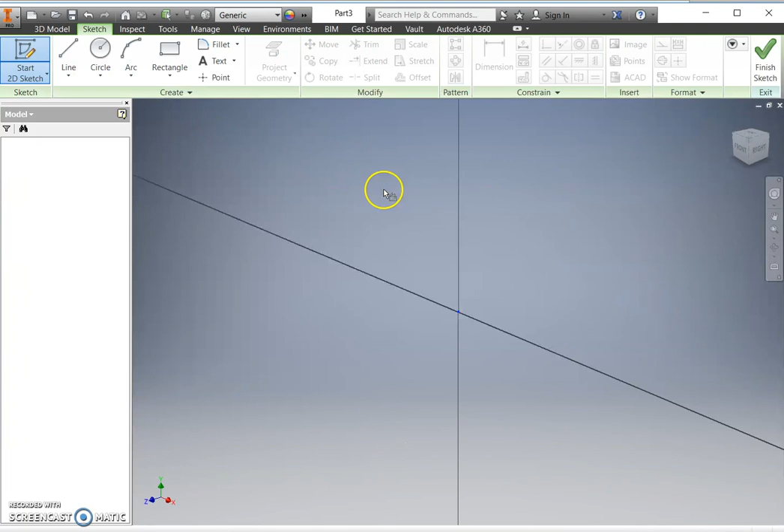Today I'm going to show you how to sketch simply using circles and then using a command called trim. So if we go to our sketch, we're going to select our plane and I'm going to draw two circles, making sure they start and finish at the same centre.

Now the sizes we were given, if we go back to our drawing here, radius of 60 tells us we're doing a diameter of 120, and a radius of 75 tells us we're doing a diameter of 150. So remember those two key sizes, 150 and 120.

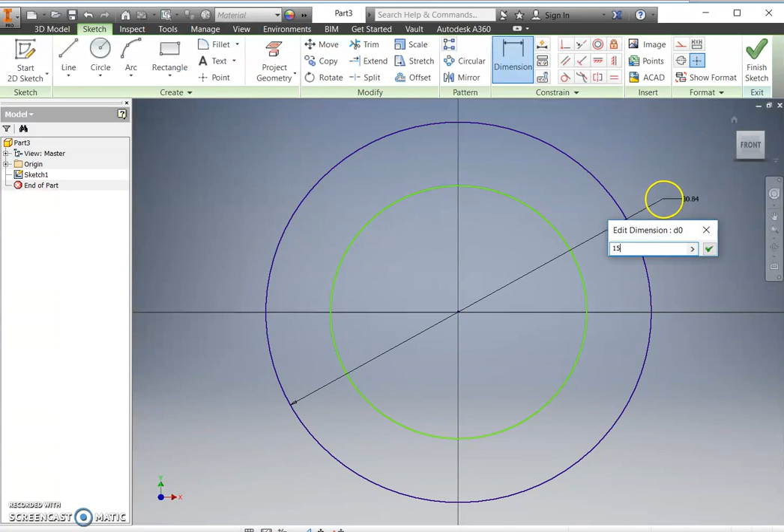So I'm going to use my dimension tool. My outside size is 150. I'm going to zoom all so I can see it. And then my inside size here is going to be 120.

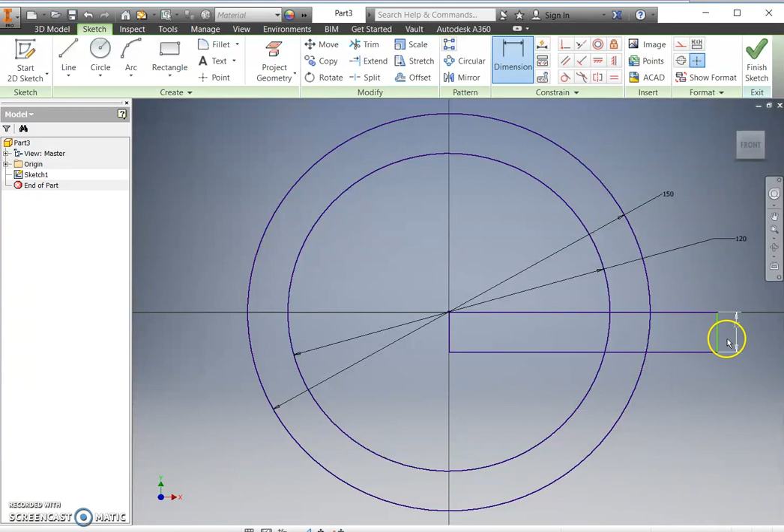I'm now going to draw two rectangles, again starting in the centre. The width here I'm looking for is going to be 15. And then I'm going to do a second rectangle down the way.

Now there are a number of different ways in which you can sketch this shape. This is one method. Feel free to use any other method.

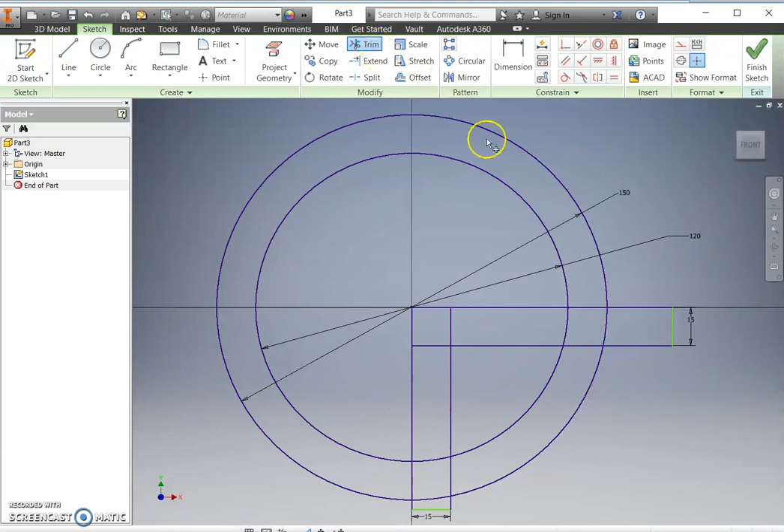So now I'm going to trim to remove the parts that I do not need. That leaves me with my curve here and here, and I'm not going to need anything outwith or within our shape.

You'll see here that it's not letting me trim this because it has a dimension on it. So if we want to do this, it's fairly straightforward: we're going to right click, delete, and then I should be able to trim away the excess material.

Likewise down here, it's saying it doesn't want to do this. Let me just move this up a section. So if I remove the dimension, right click, delete, then I can trim away the unwanted material.

And that leaves me with my basic profile. How thick this component is, I can see it is 10 millimeters.

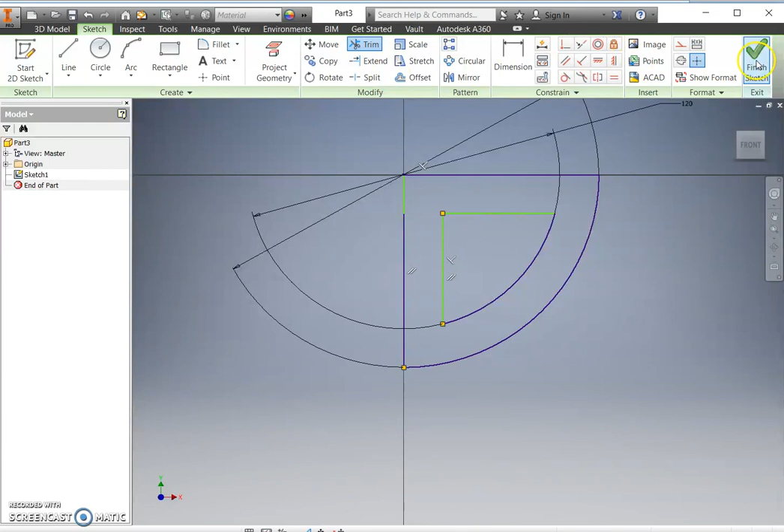So finished in the sketch, let's zoom all so we can see our profile. We're going to extrude. There's the profile, and we're going to extrude it through 10 millimeters. So that's the basic shape done.

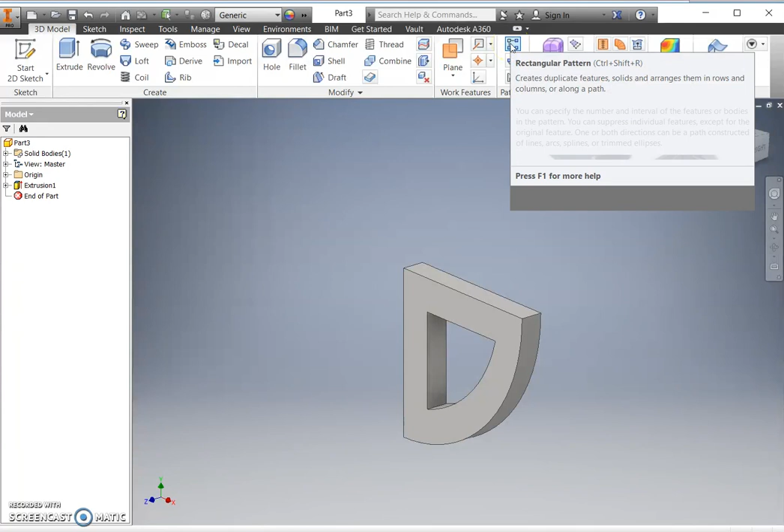That's the basic shape for both Model 4 and also Model 5. I'm now going to take you through our rectangular pattern tool, which you will need to create Model 4, and also our circular pattern tool, which you'll need to create Model 5.

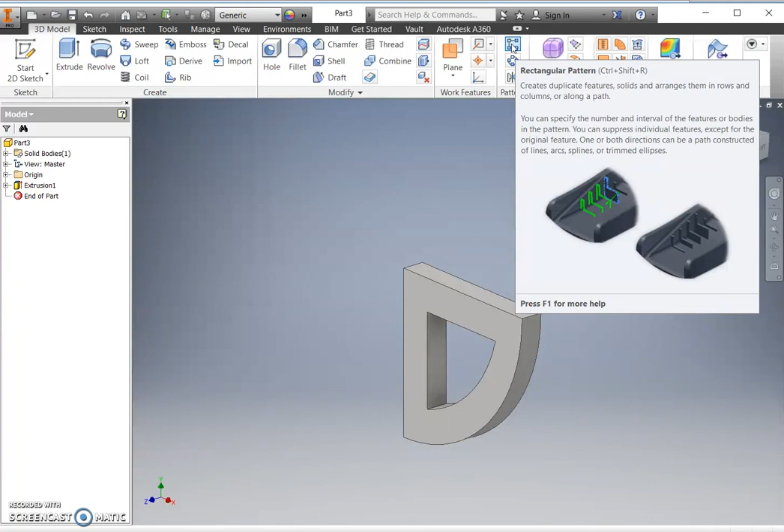So let's go with our rectangular pattern. If we just spend a little minute to have a wee look at the description here, it tells us it's there to create a duplicate feature and it arranges them in rows or columns along a path. So it allows us to repeat things over and again without having to model them a second time. So the first thing I need to know is what feature I'm going to repeat.

I can either select it from here or from my model tree. We then need to decide which direction we want to model in.

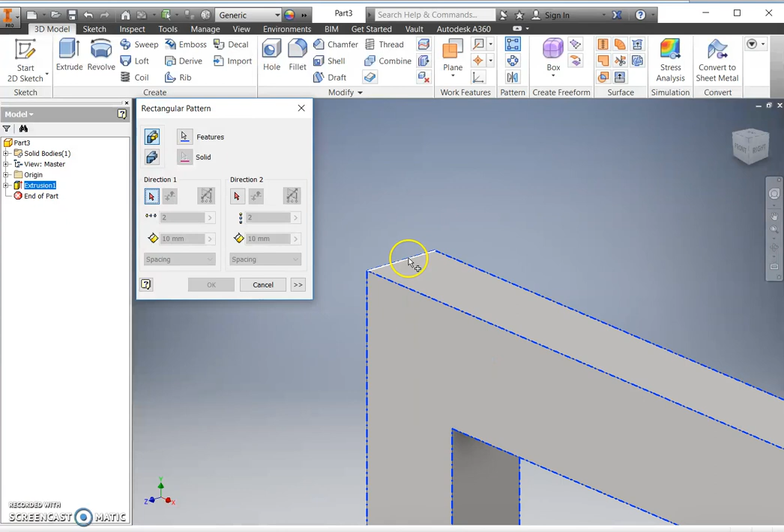If I select one line, let's go into direction 1, and I'm just going to zoom in here to select this edge. You'll see it's looking to pattern along in this direction, and I can change the sizes to whichever distance we need them apart. I'm just going to cancel that for now.

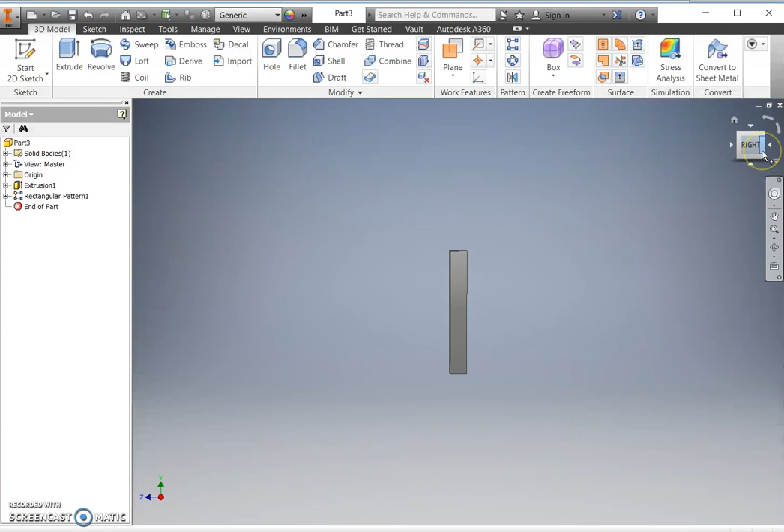I can also rectangular pattern again. I can select the feature, select the direction, and select this edge. Again, I could put a value in. But if we look at this, we're not going to get the model done correctly, so this is the wrong method for this particular one.

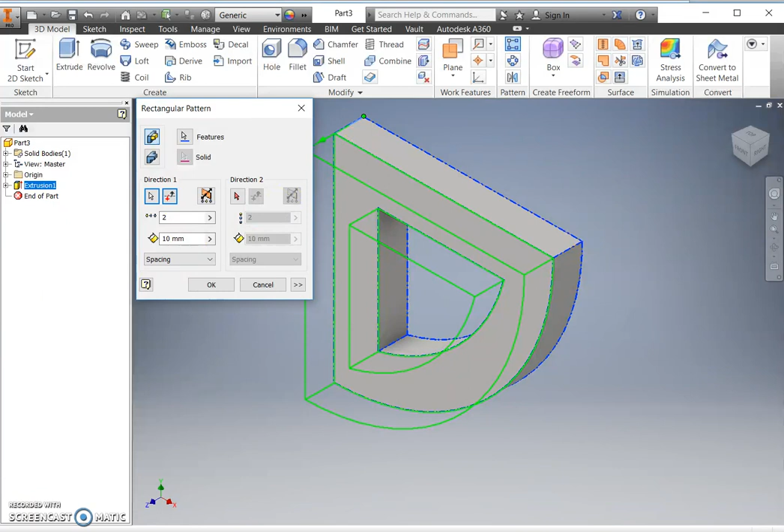So I'm just going to delete and we'll go back in. Let's zoom all, rectangular pattern, select the feature. We want to select the edge or the direction which we wish to copy, and then we need to get the distance, which we will gain from studying our drawing.

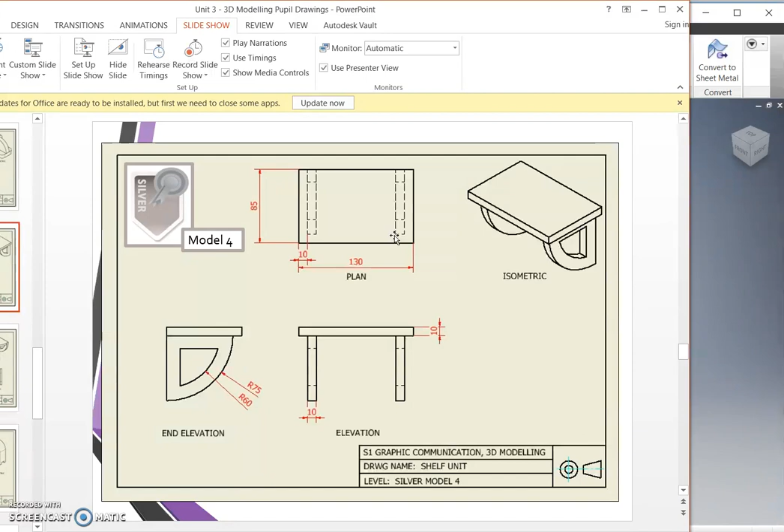But when we rectangular pattern from one point and one part to the same point, the size that we're looking for here that we're going to rectangular pattern is going to be 120. OK, so that gives me the two shelves.

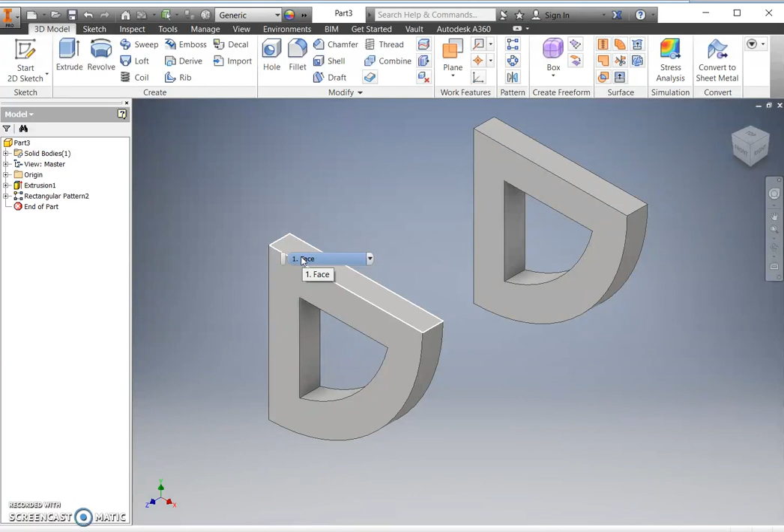I can then create a sketch on top to add the rectangle to give us the base of the shelf. I'm now going to show you our circular pattern, so I'm going to delete what we have here by simply right-clicking, delete.

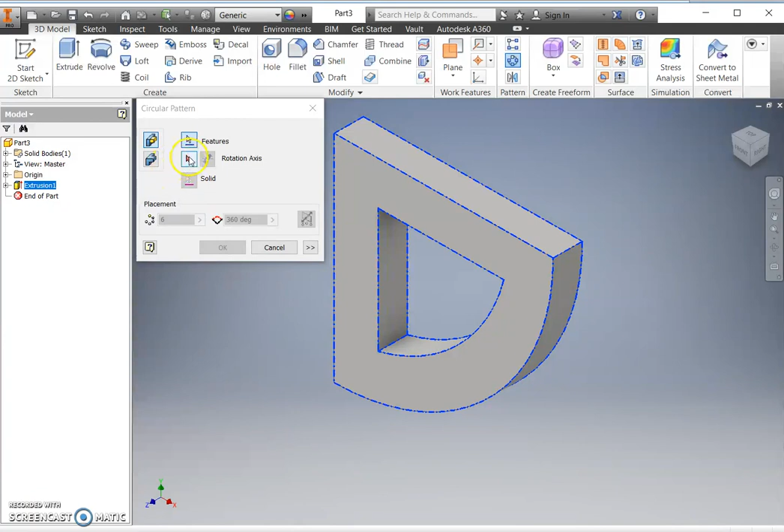Our circular pattern does something very similar. This time, rather than us rotating round, taking it straight across, we can rotate round an axis. So I need to select my axis, and you'll see here we've got 6, and this looks like it's going to be fairly complicated. We're only looking for 2, but also we're looking for the angle between them not to be 360 degrees.

Now let's look to see how this changes as I change the size. So there's 180 degrees and there is 90 degrees, and we can OK. So that gives me the 2 sides for my circular pattern.

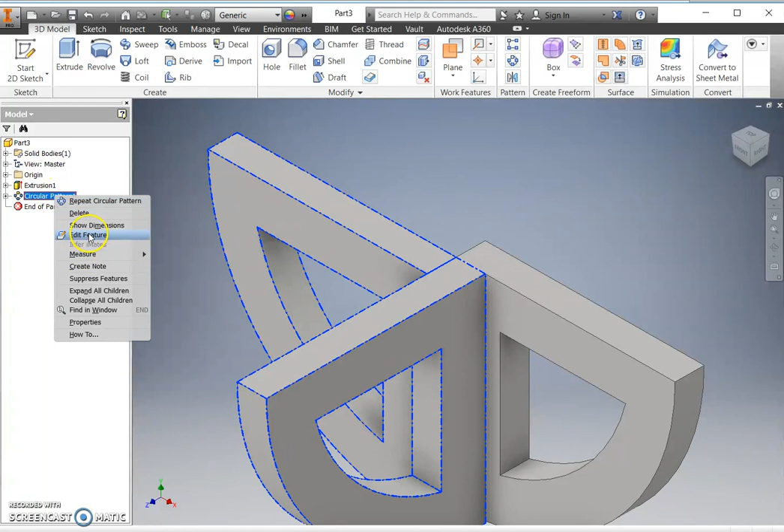We could again right click, edit feature. It may be that we're looking for a shelf that has 3, or a shelf that goes round 180 degrees, and we can OK it. So you can see how we can repeat the shape a number of times using our circular pattern. Again, I'm just going to leave this with 2 brackets that we need and the angle of 90.

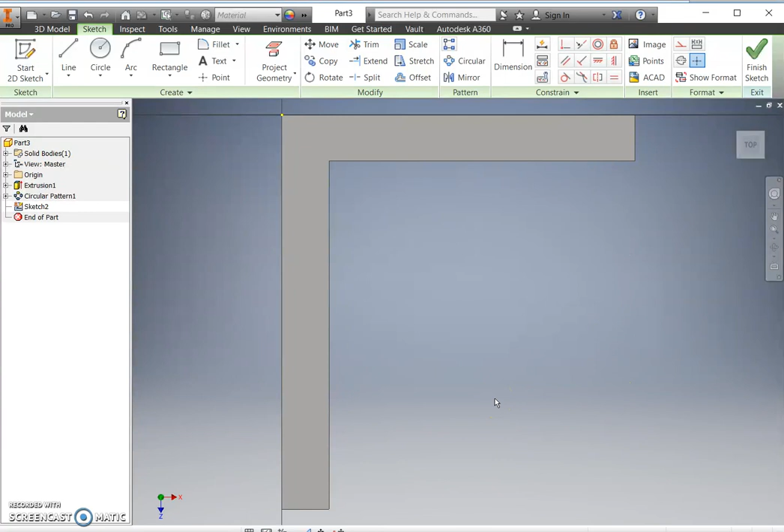Again, to complete this particular model, we will look to sketch on our top surface. Let's zoom all, and then we can use our arc tool to create our arc to get the top profile, or if you wish, you could use your rectangle, and feel free to change the shape of this particular shelf to something that you're happy with.

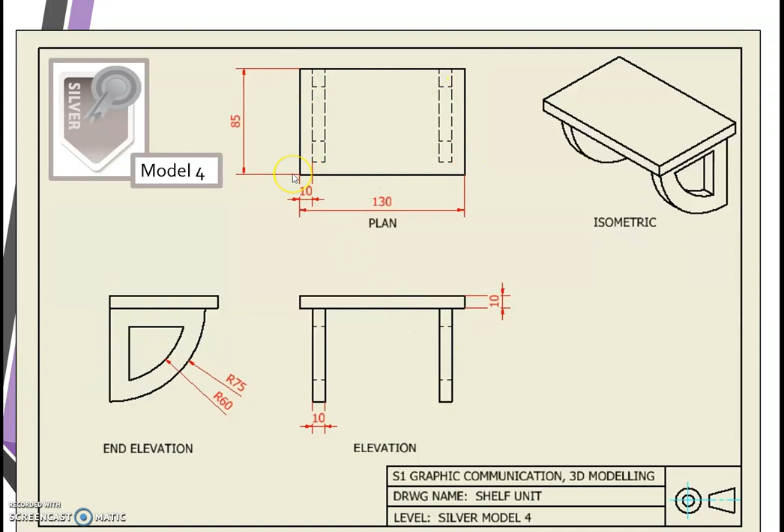Okay, so both our model 4 starts life with this basic shape, the rectangular pattern, and then we can sketch our rectangle and dimension accordingly for the top. And for model 5, again we start with the basic shape. We are then looking to circular pattern, and then we can add whichever shape we wish for the top bracket.